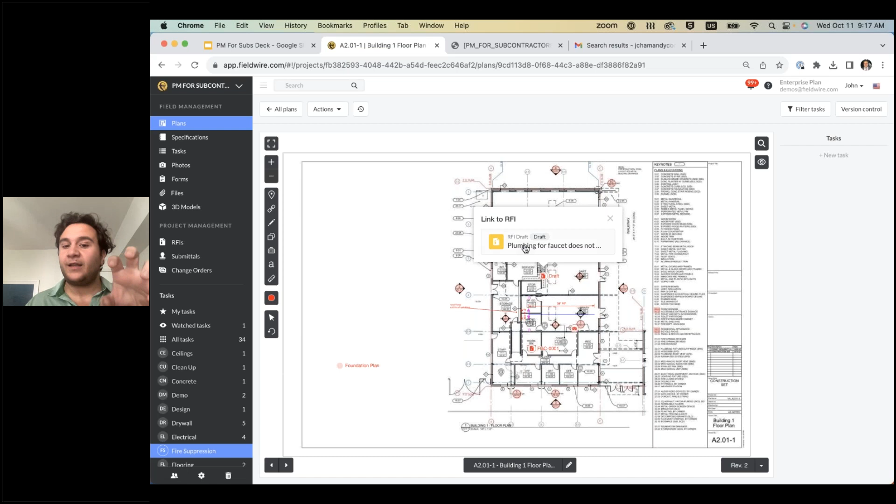Second option, I can also create an RFI directly linked to the plans if I want to—start one that's a draft directly linked to the plans. Or thirdly, there's a great task-to-RFI workflow, which is the one we're actually going to highlight today. So let's go ahead and highlight that workflow.

I always like highlighting this workflow when we first show the product to clients, for a couple main reasons. First, when I was a superintendent in the field, I had my field engineers, my foreman, and other people all barraging me with questions via email and text. So the ability to organize that communication with the task module is highly valuable, and then I have the ability to upgrade that into an RFI.

In the old way of doing things, I'm getting all these text messages and emails, pulling them into Word to create my RFI template, saving that on my local server. Then maybe I'm updating my Excel RFI log. So I'm doing all these steps in multiple disjointed products, and if I miss any one of those steps, my entire job team might be misinformed.

So let's look at the workflow. Let's imagine I'm a foreman in the field. I work for a fire suppression subcontractor installing sprinklers in this new school we're building. I send a new revision of the architecturals out to the field as the project manager. Jimmy, the foreman in the field, being the astute Fieldwire user, knows he can run a comparison of those two plans to see what's changed.

When he runs the actual physical comparison, Jimmy may recognize we're adding 2 new special ed rooms to this library. Okay, no problem. But he knows our shop drawing for the sprinkler system doesn't include sprinkler heads in that room, and we need to add those in to make sure this complies with New York City building code, let's say. So Jimmy directly from his iPad can mark up this plan, adding all the context for myself back in the office to see later on.

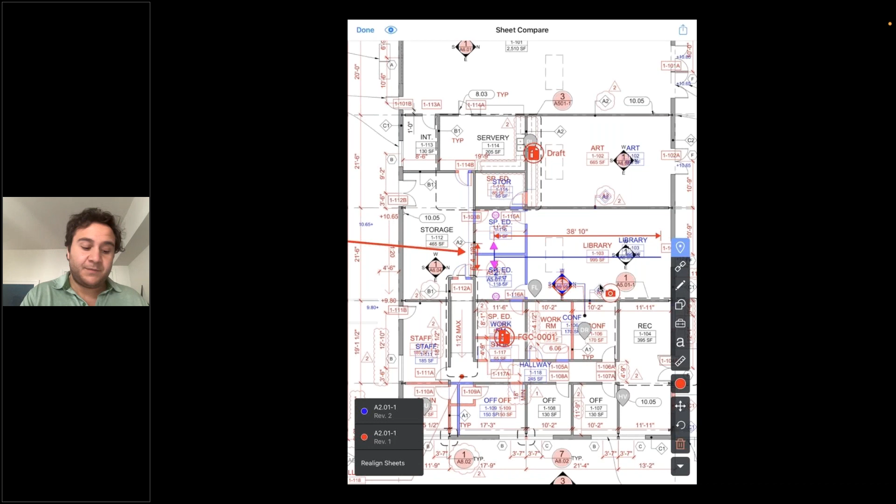Instead of emailing or texting me as the project manager, Jimmy can go ahead and create a task to communicate this issue. So let's title that task: sprinkler addition library. He can status it under RFIs and Questions, put it under fire suppression. Now what Jimmy would be able to do is attach the markups he did in that plan comparison directly to this task, for me to see exactly—like he may be doing in an email, maybe taking a picture of a plan.

Now Jimmy can go ahead and message me directly back in the office as the project manager: '@John, per New York City building code, all rooms in a school need to have sprinkler heads. We should add sprinklers to the 2 additional special ed rooms in the library,' and post that out.

So myself back in the office, for those of you that can see my camera, I get a notification directly on my mobile device as well as on my web version on Fieldwire. I can open that up and see the question that Jimmy's asked. From this point, I've got two options.

If I've got the answer for this, maybe I've already been clued into it, I can just message him directly back. With that said, if I'm ready to create that RFI, instead of copying all that information over, I can just upgrade this task straight to an RFI. Fieldwire will ask if you want to do a lot of the copying over that we would have done anyway to that original email or text message. Then in an instant, from just one click, I'm directly in my draft RFI with all that contextual information that Jimmy provided in his task.

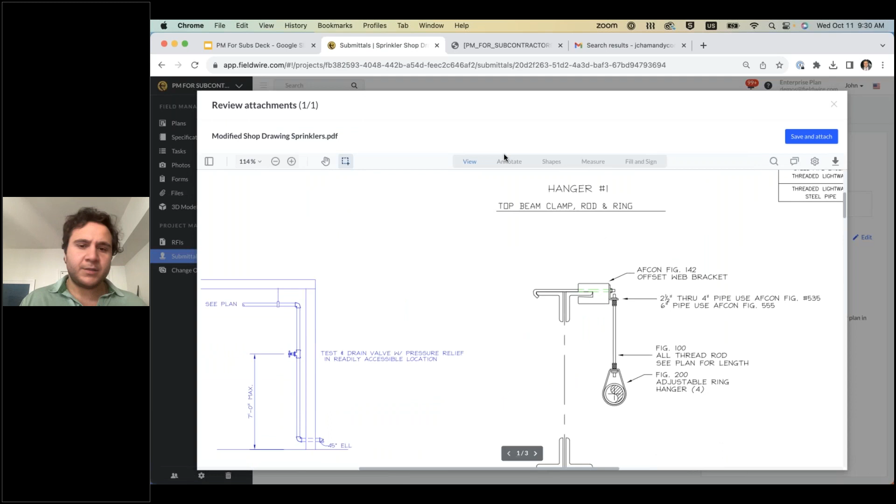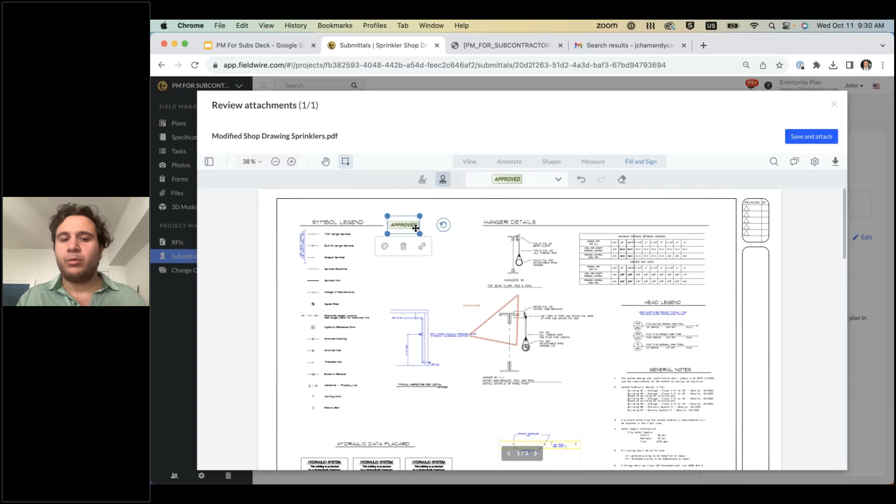I can highlight, I can draw, I can drop a little cloud revision if I'd like to, and then go ahead and even measure directly on here. Once I'm done and this is ready for my approval, I can even stamp this with a unique stamp or with just one of our baseline stamps that we provide, and we're ready to save this.

Now again, keep in mind this step isn't necessarily necessary. We could have just gone straight from the submission, but we do see our clients see a lot of benefit in this step. Now, to send this out to the GC, again, probably not on your system, but if they want to be, absolutely add them in. You could send them directly within Fieldwire.

With that said, however, in this case, I can again email this out exactly the same way I did with my RFI. Or what's even better than that is, let's say they're using another construction management product. I can actually just simply download this to PDF and input it into that product directly.

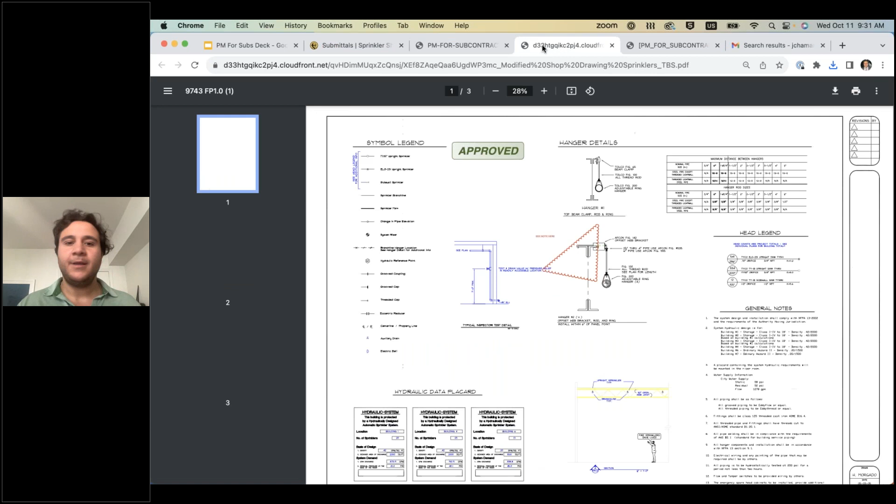Now, the beauty of this document is, one, they're going to see all the context on the reviews that have happened to this document so far. So the original submission, your review of that submission, and then their approval that you'll be adding in later. And if you're worried, hey, how do they actually access that PDF? Fieldwire user or not, they're going to be able to access that shop drawing by simply clicking on that hyperlink and accessing the information right here.

Once, hey, again, I get that email back from Brian Green, I checked their system for that information, I can simply go ahead and answer on his behalf. I can add in and upload the document that they may have sent, as well as add in their custom response based on here, add any notes, see notes in doc, and add that as the GC response. Again, then we get the tracking through the activity log and all those required steps.

At any given time, you can also create a revision of these if you need to. So, hey, we're going to revise something, no problem, you have that workflow built into the product. In this case, I'll close this out, select my distribution list, and we've closed the loop on this submittal workflow.